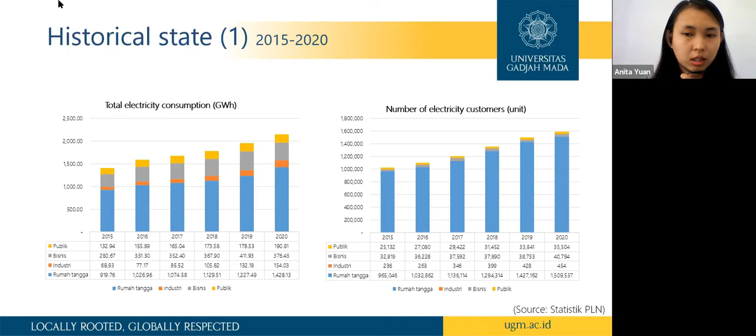In this slide, we can see the total electricity consumption and the number of electricity customers from 2015 to 2020. Here it is seen that the household sector has the highest value for electricity consumption and number of electricity customers.

Now we see the current condition of the power generation sources in 2020 in NTB province, and this is dominated by natural gas, followed by coal and diesel power plants. So we can conclude that electricity supply until 2020 in NTB is still dominated by fossil generators.

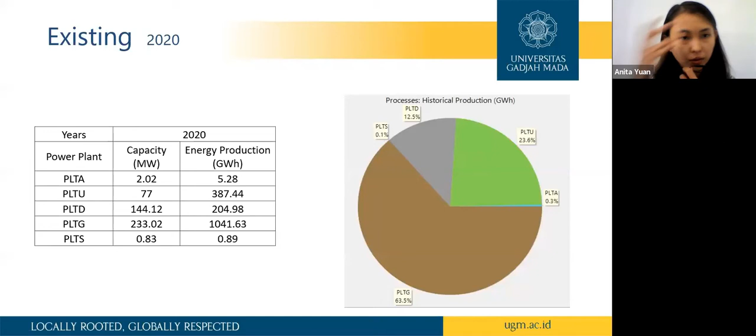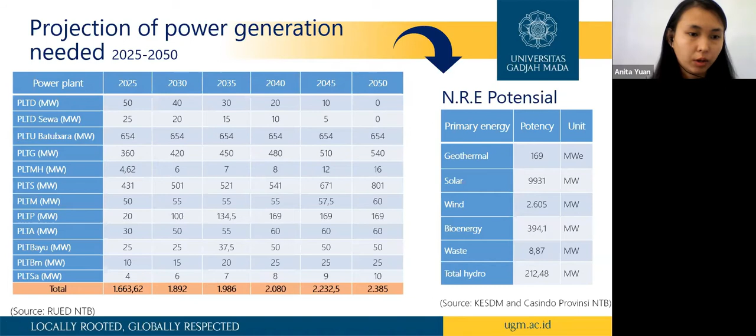Through the General Energy Plan, or RUED, of NTB province, we see that they began to increase the use of solar energy for power generation. This can be seen from year to year, and it is in line with their potential, which shows the largest source potential is solar power, followed by wind power.

After the introduction, we start the methodology. This research process can be seen from the following flowchart. We start with problem analysis, then literature review, and we define the scenarios.

From this stage, we determine 3 scenarios to be analyzed: the first is BAU, business as usual scenario; the RUED, the energy planning scenario; and the scenario of dominance of renewable energy sources. After that, we collect the data from each scenario, perform the simulation, analyze the simulation result, and then we are done.

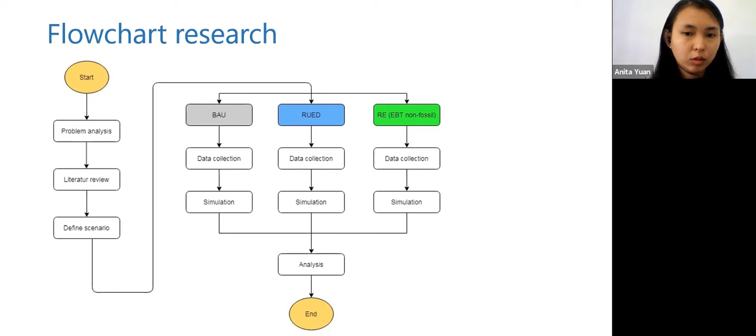Here we can see the methodology of this research. We use a low emission analysis platform, or LEAP application, to project the electricity sector in NTB until 2050. LEAP assumptions are determined by population growth and GRDP.

So we start with the research. We start by collecting data of NTB province from NTB Statistik, PLN Statistik, RUPTL 2019 to 2028, and from EBTKE Statistik.

This research compares three different scenarios: business as usual (BAU) scenario, rencana umum energi daerah or regional energy plan (RUED) scenario, and renewable energy (RE), which is the non-fossil scenario.

The BAU scenario projects the electricity sector just using existing data, which means it's still dominated by fossil fuel base. The RUED scenario is the projection using existing data from RUED. The renewable energy scenario projects reducing fossil fuel use to zero by 2050, based on RUED optimization.

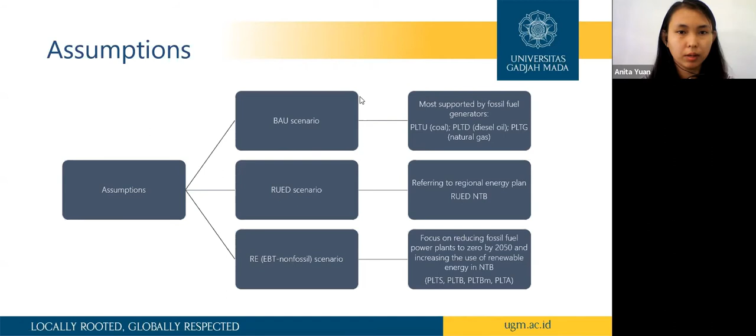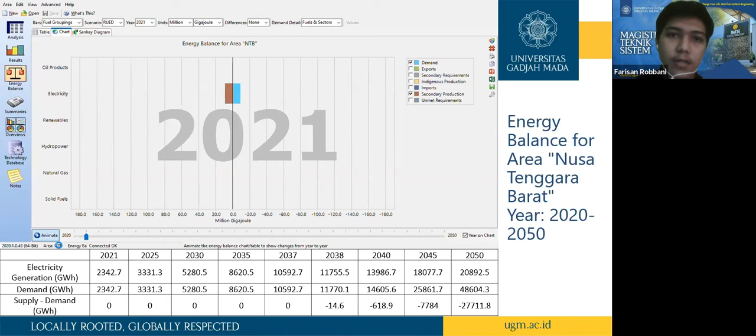Now, first of all, I want you to watch this short video. This is energy demand and supply from 2021 until 2050 in Nusa Tenggara Barat. As you can see here, there is increasing electric supply and demand until 2050.

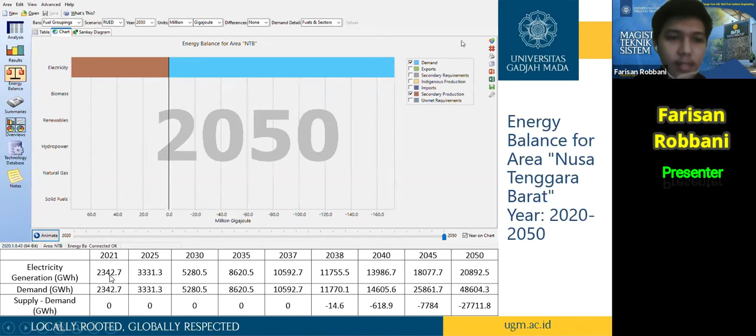But look at this table. The generation of electricity in 2021 and demand stay the same until 2037. The next year, 2038, was different, and it makes supply and demand minus 14.6 gigawatt hours.

What does it mean? It means we need supply of about 14.6 gigawatt hours in 2038, increasing until 2050, where it becomes 27.7 terawatt hours. So this is the difference between supply and demand until 2050 in Nusa Tenggara Barat.

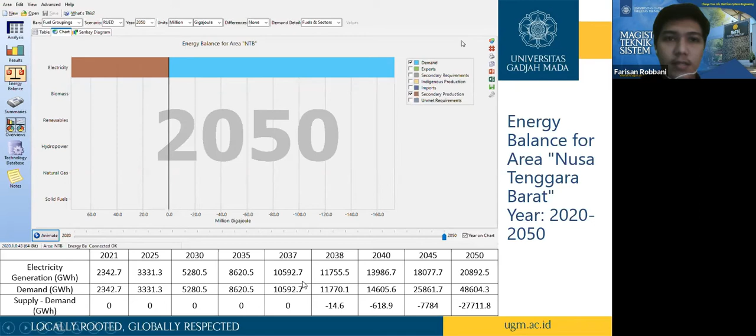Here's the short video again. Next is the energy demand. So this is the energy demand by final units.

Okay, next, this is the output fuel by BAU scenario, or business as usual. As we can see in 2020, PLTG is the highest, and the lowest are micro hydro, geothermal, wind, biomass, and waste, followed by coal.

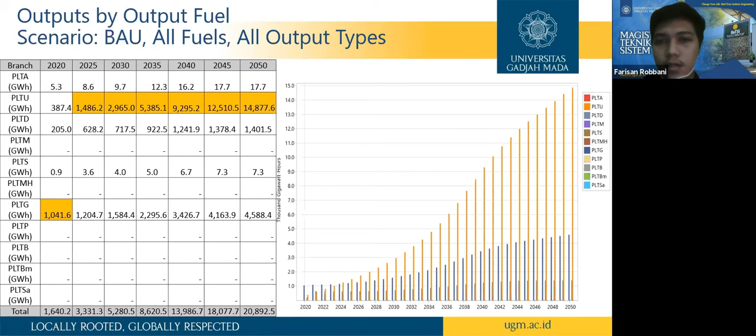Next is the RUED scenario. As we can see in this chart and table, in 2020, gas power plant was the highest, and the lowest were micro hydro, geothermal, wind, biomass, and waste.

But from 2025 until 2040, it was taken by coal. However, from 2045 till 2050,

the highest was solar power plant, at about 7.016 gigawatt hours. This table shows the increase of solar power plant here until it's the highest in 2050.

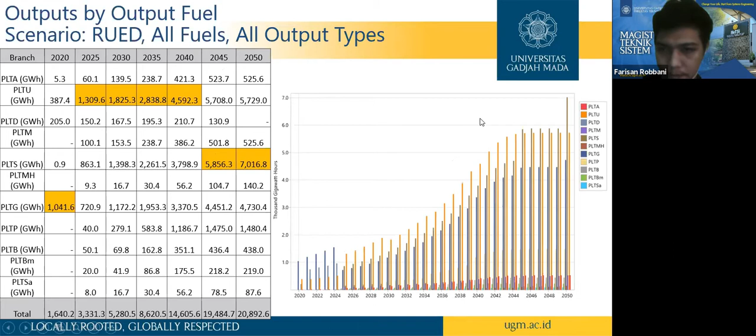Next was renewable energy, or non-fossil.

The same was true in 2020 where gas power plant was the highest, but from 2025 till 2050, solar power plant became highest, about 12.246 gigawatt hours. This graph shows solar power plant increased significantly from 0.9 to 1,000.2 gigawatt hours. Interesting, right?

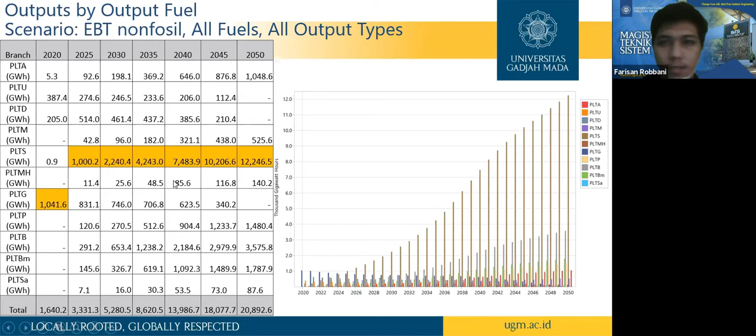Next, we go to the BAU, RUED, and renewable energy mix. As you can see in this short video, we combined the BAU, RUED, and renewable energy into one short video, showing the increasing BAU, renewable energy, and RUED from each branch, from PLTA until waste power plant.

So from the short video, we know that in 2030, BAU was the highest, and the lowest was micro hydro, geothermal, wind, biomass, and waste. From 2040, BAU was still dominated by coal, and in 2050, coal was still the winner in the BAU sector.

But in renewable energy, in 2030 solar power plant was taken as highest, and the lowest was waste. In 2040, still solar power plant, and the lowest is waste. In renewable energy overall, solar power plant leads, and the lowest is coal, diesel, and gas. This is why in renewable energy we reduce the coal.

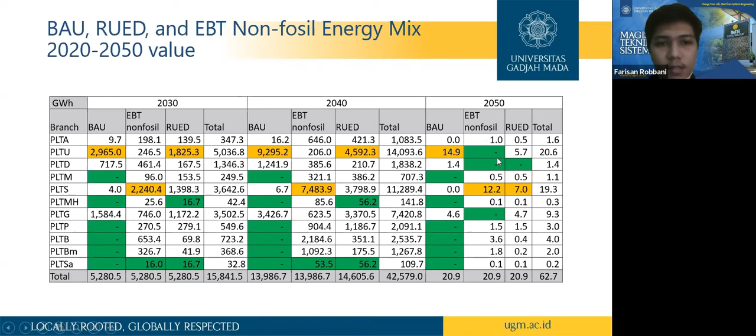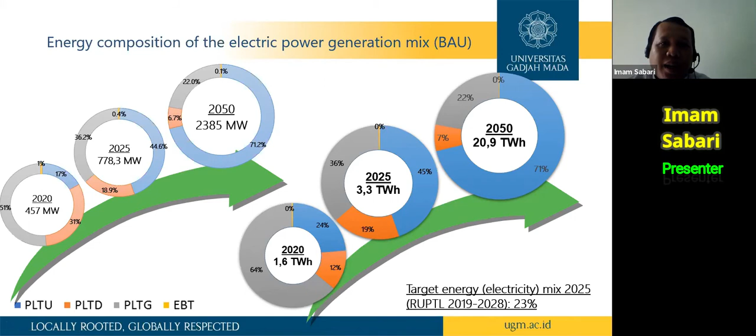First, about the energy composition of electric power generation, starting with scenario BAU. In this scenario, electricity supply is majority supported by fossil fuel. On the left is installed capacity and the right is electric power generation. It's shown that in 2025, the electricity supply mix is dominated by fossil fuel, about 45% by coal power plant, and renewable energy is only 0.4%.

In 2050, the composition of electricity supply is 71% supplied by coal power plant, and only 0.1% supplied by renewable energy. We must know that the energy mix target in 2025 based on the electricity provision business plan, RUPTL 2019 until 2028, is 23%. So the BAU scenario cannot meet the target.

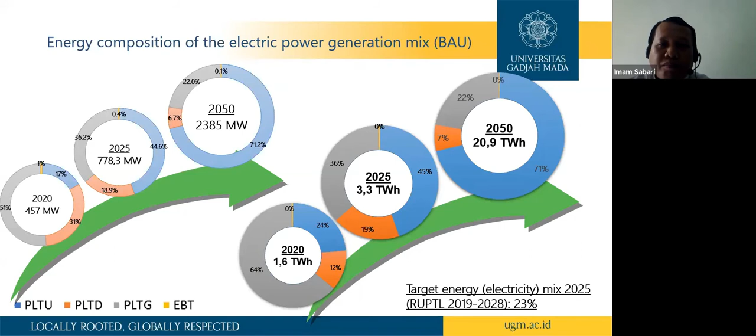Okay, next slide, please. Thank you. In this RUED scenario, there is an increase in the use of renewable energy and a decrease in some fossil fuel.

Next slide, please. Okay, this is about the scenario of EBT, or renewable energy non-fossil, where fossil fuel use is assumed to be zero in 2050, based on RUED scenario optimization.

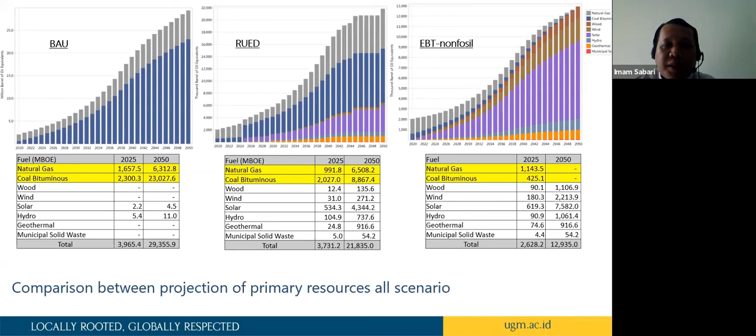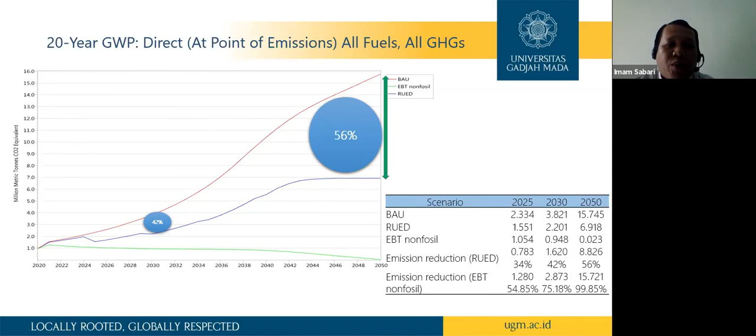Okay, now we come to the next slide. We come to the end of the session, and I will try to summarize the main points of what we presented from beginning to end.

First, an increase in the number of electricity customers and the intensity of sectoral electricity increases the total electricity demand significantly. So it is necessary to plan the supply of electrical energy appropriately, around 27 terawatt hours in 2050, and promote efficiency of electricity consumption, such as the use of energy efficient electrical equipment and an energy saving culture.

By turning off electricity when not in use. Second, the RUED scenario has been able to meet the target of the electrical energy mix RUPTL of 35% in 2025. Third, the BAU and RUED scenarios require a sufficient supply of primary energy, especially fossil fuel, until 2050.

Whereas the EBT, or renewable energy non-fossil scenario, reduces fossil fuel dependence to zero by 2050 and provides better energy security. Fourth, emission reduction in the RUED scenario against BAU is 56% in 2050, and for the EBT non-fossil scenario it is 99.85%.